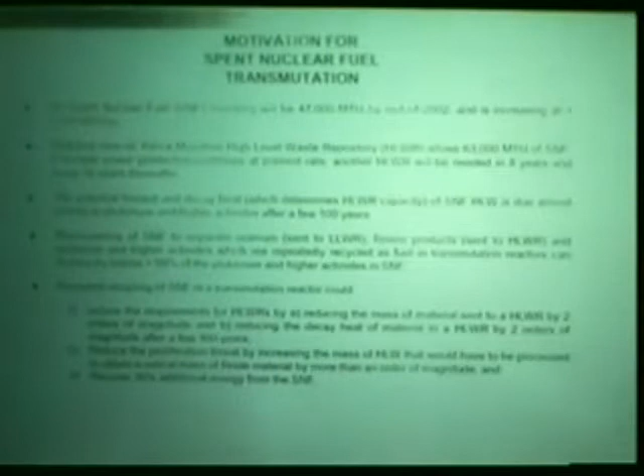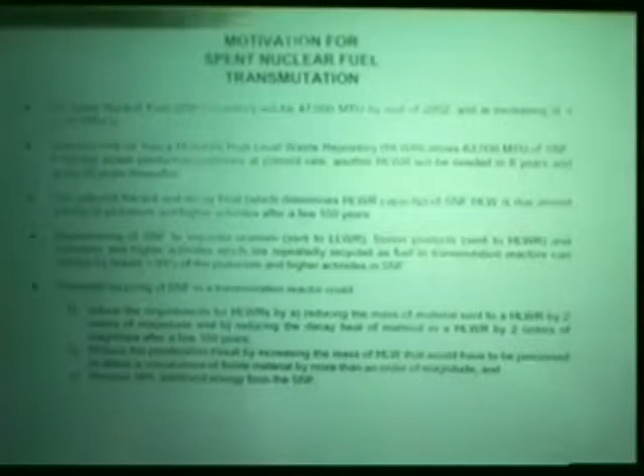The thing that really determines the capacity of a repository is the heat, the decay heat that comes out, and to a much lesser extent, the radioactivity associated with it. The idea of transmutation is that the decay heat and radiation for the first few hundred years is mainly fission products, but after that, it's the actinides, plutonium, and the higher elements. If you can get rid of them, basically fission them and turn them into fission products, then you can transform a 100,000-year problem into a 1,000-year problem. So that's the idea of transmutation.

When you start looking at it a little bit more, what you have to do is keep recycling this stuff, keep sending the actinides into a neutron source until you fission all of them. Of course, you're going to have materials damage that limits you before that happens, so you're going to have to reprocess. But if you do this continuously or repeatedly, you can end up reducing by a couple of orders of magnitude the amount of stuff, either in terms of heat or in terms of mass, that you have to put into a repository.

And so even if you can reduce it by an order of magnitude, your every 30 years goes to every 300 years before you have to build a new repository. So it's worth taking a look at.

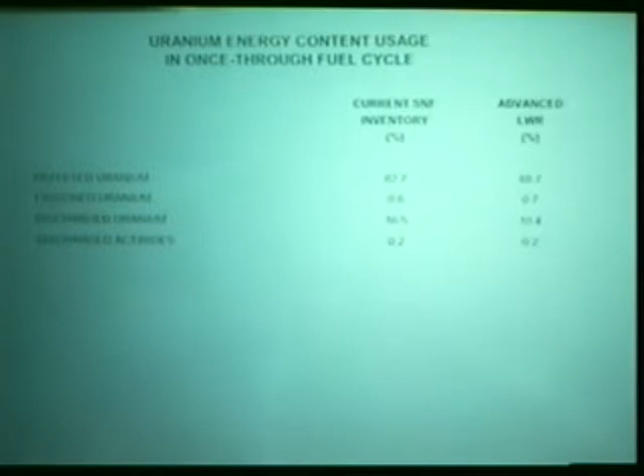Just a diversion on what we actually do with the energy content of uranium as it comes out of the ground. About 83% of it we just set aside after we enrich the uranium - this is what's left in the enrichment plant. We fission about 0.6% of it, we discharge about 17%, and in the actinides from this discharge we've got 0.2%.

Let's see, is there a... yeah, I need one.

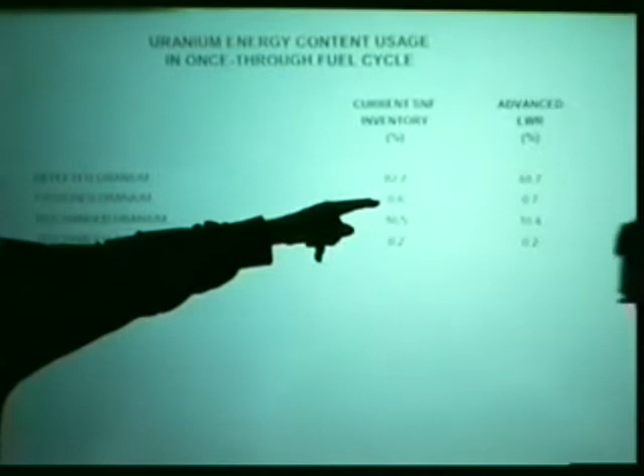So this is how much energy we're making use of right now, and we've got this in the actinides. So if we do this transmutation, at the same time that we're getting rid of the problem of waste repository, we're getting another 30% of energy.

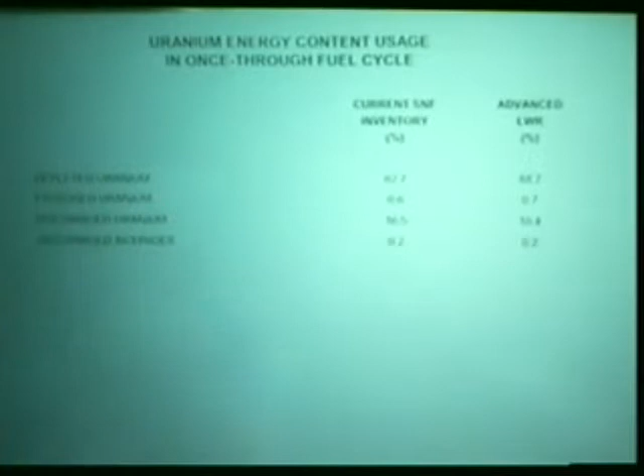Just something to point with. So, laser pointer - yeah, I got that.

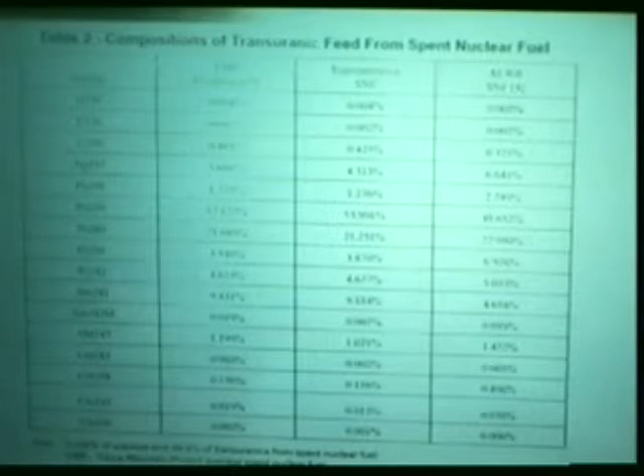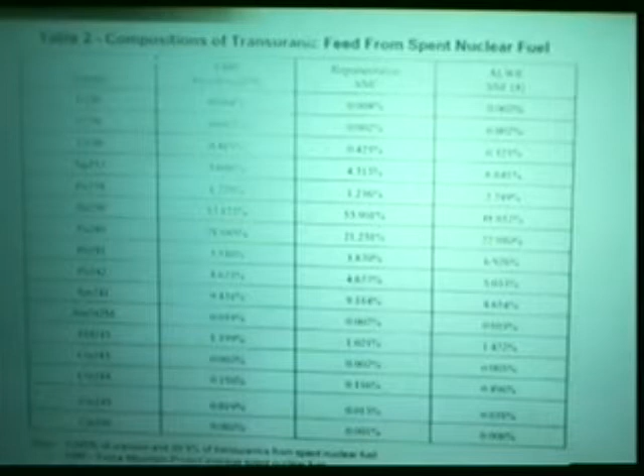All of these things have a fission cross-section, and so if you want to get rid of them, you have to fission them. If you just capture a neutron in them, then they go to another one - so you've literally just wasted a neutron, because you're going to have to get rid of that too.

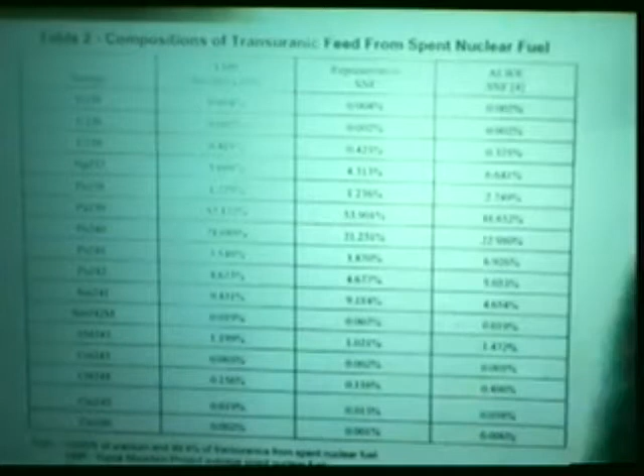Old technology, okay, alright. I think we can get started on this. So this is just in the way of background - this is what's in it.

So, how do you get rid of it? You get rid of it by fissioning it. Does everything have a fission cross-section? Yes and no - this is the fission probability of all of these various things.

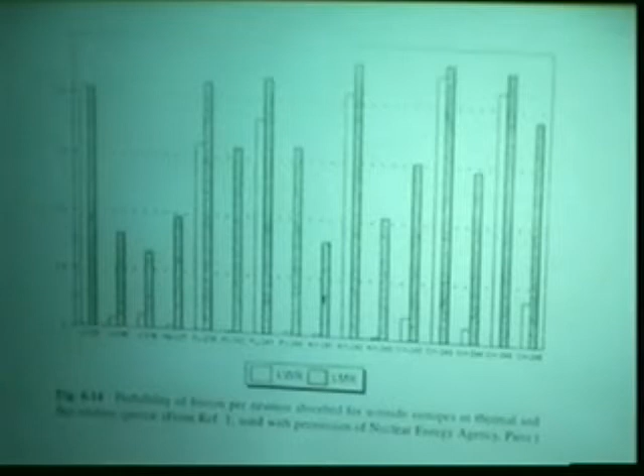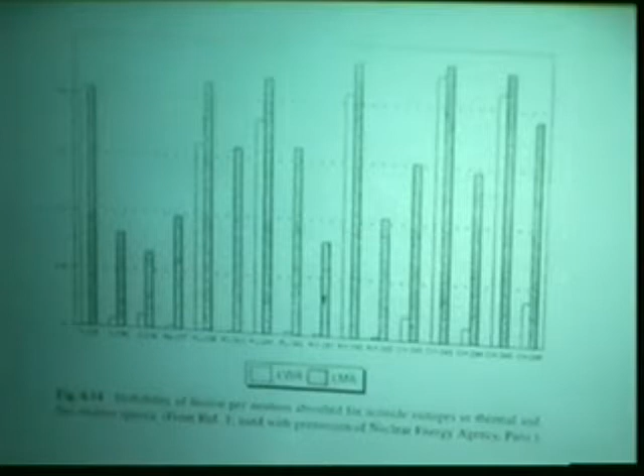Can you actually see these things? Okay, so this is U-235 in order. The crosshatched is the probability of fission if a neutron gets captured in a fast spectrum. The white is the same probability in a thermal spectrum. So you can see that in a thermal reactor, there are a lot of these things that are just not going to fission. But they all have a significant fission probability in a fast spectrum. And so, fast spectrum.

All right, what have people been doing about this? For the last roughly a decade or more, there's been a lot of interest in this worldwide, particularly in Europe, but also here and in Japan. So there have been a lot of studies of fissioning these isotopes.

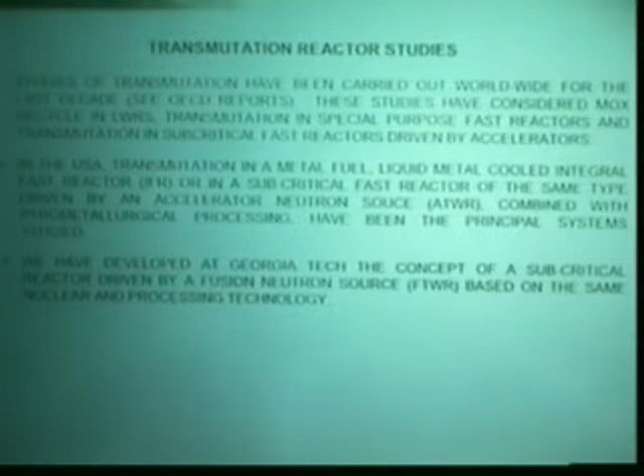And there are several ways you could do it. You could simply reprocess it, put it into mixed oxide fuel, and put it back in a light water reactor - try that, keep on doing that. You could put it in a water reactor, so it's going to have a thermal spectrum, so it's going to work, but not so well. You could build a fast reactor and do it there. You could build a subcritical fast reactor and drive it with an accelerator, and you still got a fast reactor - it's just one that's subcritical.

And so there have been an awful lot of studies on those sort of things. I'll show you right at the end some references - lots of reports, conference reports, websites and whatnot where all of this was documented.

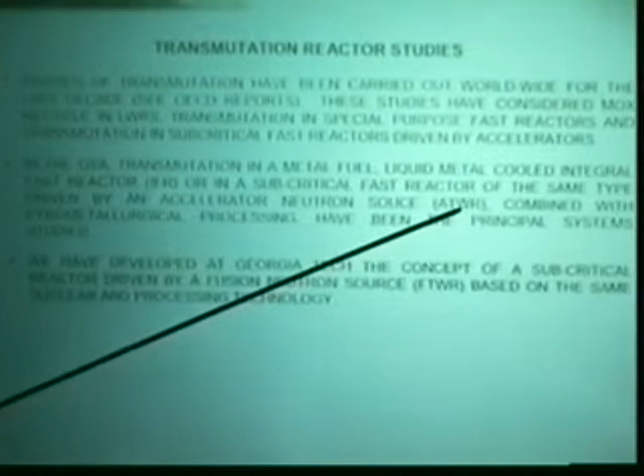In the U.S., there's been a lot of work that has concentrated on using basically the Argonne Integral Fast Reactor concept, which is a metal-fueled, liquid metal-cooled reactor, with the Argonne pyrometallurgical processing techniques to accomplish this, both in a critical reactor and in a subcritical reactor driven by an accelerator source - I'll refer to that as ATWR, and the critical reactor is the Integral Fast Reactor. So this has been where most of the work in the U.S. is concentrated in the past. This is changing now, but up to now, this is where the action has been.

As Lee said, I'm interested in fusion. It occurred to me that fusion makes neutrons too, and might actually be a little bit better neutron source than an accelerator. Probably get some argument from some people on that, but at any rate, a few years ago I got interested in it with the idea of, well, let's see what fusion could do for this too. So we've had an effort at Georgia Tech for the last couple of years, and there are a couple of other people around the country looking at this sort of thing, and I'll tell you a little bit about this in the process of going through this.

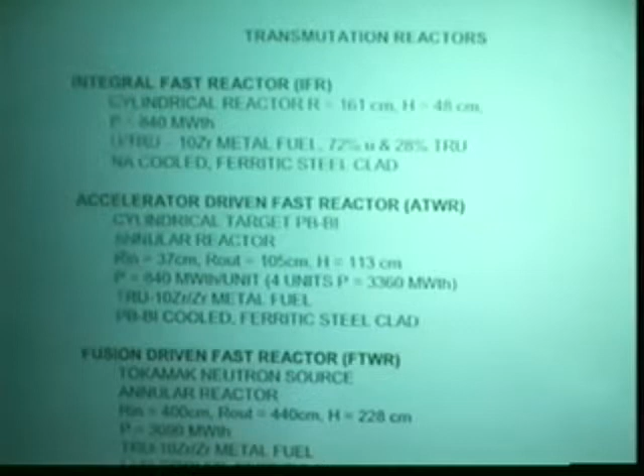All right, so what are those reactors that we're talking about? We're talking about basically the reactors that the U.S. has been looking at. So the integral fast reactor is basically a cylinder about 1.5 meters in radius and about 0.5 meter tall, 840 megawatts, sodium-cooled ferritic steel clad material.

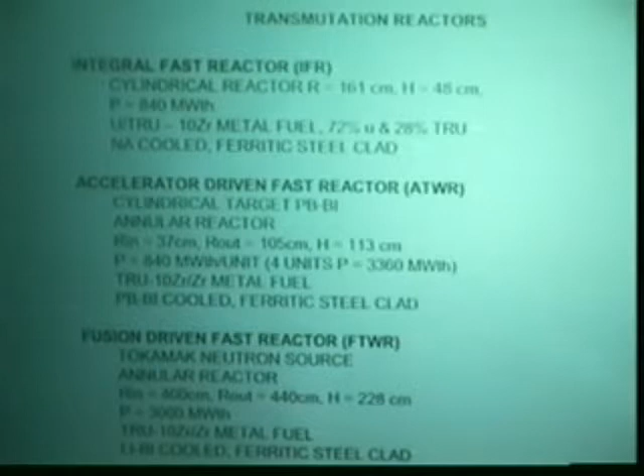And the fuel in there is uranium plus whatever actinides that you're putting in, plus what I showed you in that second view graph. And in fact, it's 72% uranium and 28% TRU, a buzzword for transuranics, the stuff we want to fission. So this has got 72% U-238 in it. So that means a reactor like this has as its purpose to destroy the actinides.

It has the U-238 in it because it needs the Doppler effect for safety. But having the U-238 in it, there are going to be a lot of neutrons captured in U-238, and what are they going to do? They're going to produce actinides. So they're going to cut down on the net destruction.

And so one of the ideas of operating subcritical is to leave the U-238 out. Because if you've got a bigger margin to a runaway, then you can afford not to have that fast Doppler, or at least that's the postulate.

So the accelerator thing is the same thing, except the accelerator target is something like that sits in the middle, and then that's surrounded by an annular reactor. You can see the dimensions here, and it was designed to be at the same power, and it uses the same fuel, except it just has just the transuranics that you want to destroy. No uranium, but basically replace the uranium by zirconium in there.

So in this, we're not going to make anything. And then we looked at this and said, okay, well, we'll do the same thing. We'll have the same type of technology. And so we're going to use exactly the same fuel as here. Well, I should say this is lead bismuth cooled. This one was sodium cooled. And I see here my secretary invented a new coolant.

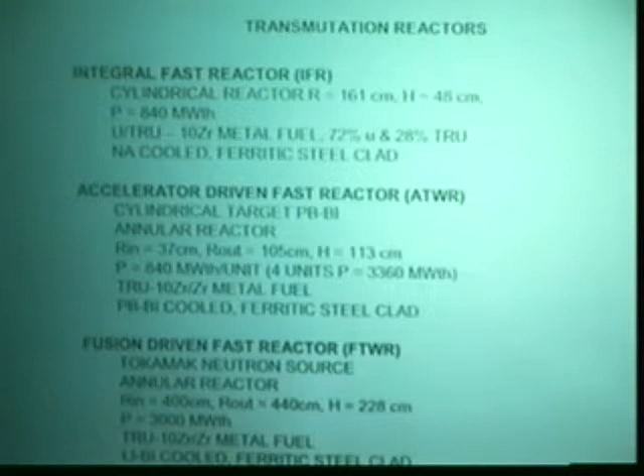But this is really lead lithium cooled down here, because in a fusion device you need to make tritium, so you need the lithium. And so that's what we added. So I'm going to show you during the course of the talk some comparison of the performance of these different things, at least to sort of isolate what is important about the differences.

But first, I have a colored picture of our fusion design, and this actually, I see all the design prizes along the wall here. This actually came out of our senior design class a couple of years ago, where we sat down and designed a fusion device that would do this job.

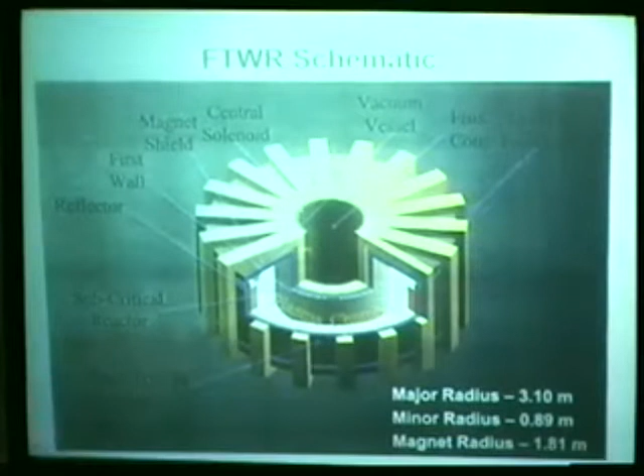So this is sort of a standard tokamak. These are magnetic field coils around here, and then the plasma goes around in a donut-shaped configuration like that. And then the reactor is sitting right out here. Okay, so it's right outside the plasma, and it runs all the way around. Funny reactor, but with this geometry, that's where it goes.

And so this is the subcritical reactor we're going to put out there. This particular design is with copper coils, and you can get those down to about 3 meters from here to here. So that's the dimension on this thing.

All right, these—forget the numbers unless you're particularly interested in fusion. Those are for people that will look at it later. But the philosophy of coming up with this design was to avoid pie in the sky, which is what fusion is usually accused of. So for the design of that device, we took the existing physics database, the same thing that ITER's being designed on. So physics that's already been achieved.

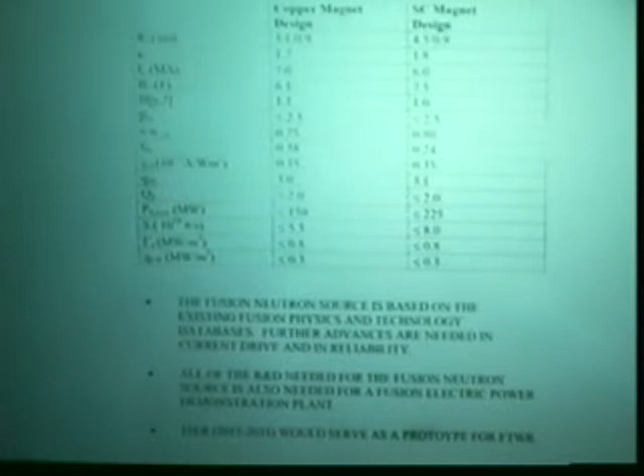And we took the existing physics technology, which Dr. Shannon has actually been involved in developing, along with other things.

So this is existing technology with one exception: the lead-lithium technology is not there yet, but it is heavily under development, especially in Europe, for fusion uses.

The next question is, if I were talking to a fusion purist audience, they'd say we're on a track to develop electricity and don't want to be diverted by something like this. Well, this is on the track, because you need exactly the same technology, and everything you learn here is going to help you on the path to electricity.

In the process, we're very soon going to hear an announcement that this first-generation fusion plant is going to go ahead, and the U.S. is going to join it. High probability for the first, a little bit lower probability for the second, but at any rate, this sounds like it's going to happen.

So this device might break ground for construction by next year, and would serve as an excellent prototype for this. It does all the things you need to do in a prototype to be ready to move into a transmutation reactor of this sort.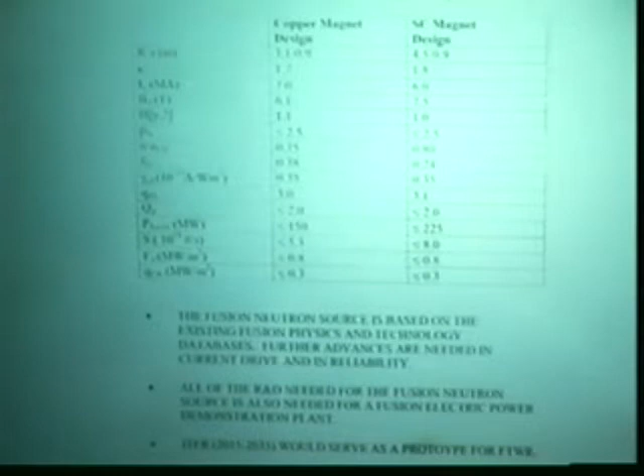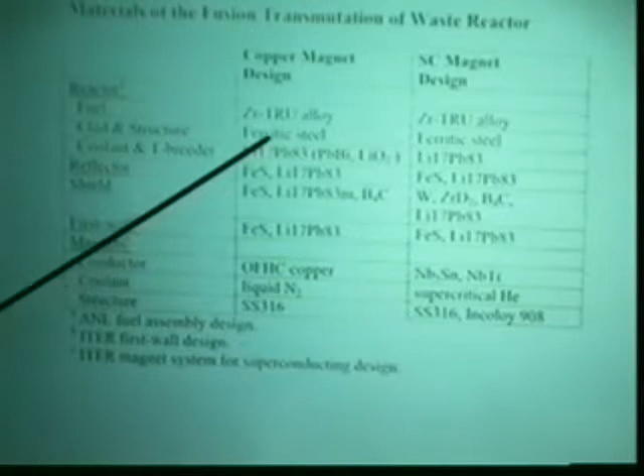Again, a little more detail than you probably need, but we looked at two designs: one with copper magnets, which I showed you, and another with superconducting magnets. In the reactor, we're looking at a zirconium and transuranics alloy metal fuel, using ferritic steel for clad and structure, and lithium lead for the coolant. We also looked at another option using lead bismuth because the accelerator design was like that, but our primary option is this. I don't think the structure or material of the magnets are particularly relevant.

Coming back to the reactor, what does it look like in more detail? Here's the tokamak, and this belt running around the outside is the reactor. You can see it in a better configuration here, and I'll give you the numbers on the next view graph. This belt is made up of fuel assemblies.

These are the same fuel assemblies, except for the height, as the ones Argonne has designed for the integral fast reactor and for the accelerator reactor. So we're talking about using existing nuclear technology at this point, not inventing some miracle material or design. We're taking the nuclear technology being used for the other U.S. designs, and this thing simply wraps around.

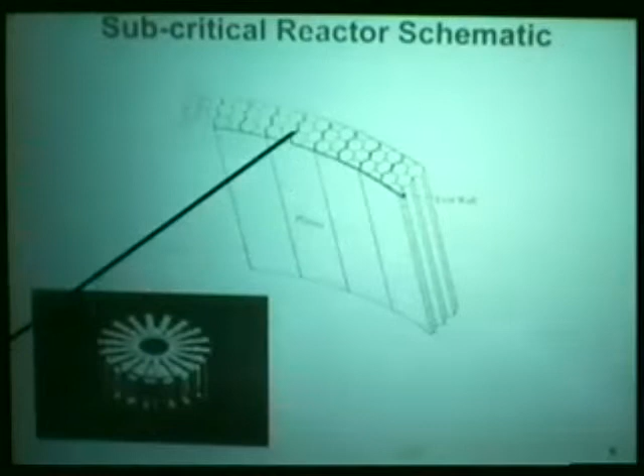Just a little more detail. You can remember this is the same picture as before. Each of these assemblies has 210 fuel pins and 7 structural pins. The assembly is 2 and a quarter meters in height, and the cross flats of one assembly is 16 centimeters. There are 470 of these assemblies wrapped around the outside.

We just took the Argonne design, so there are lots of detailed numbers. This has been looked at in detail, including the heat removal, and it actually works. In fact, people do it better than we do, but we also looked at that.

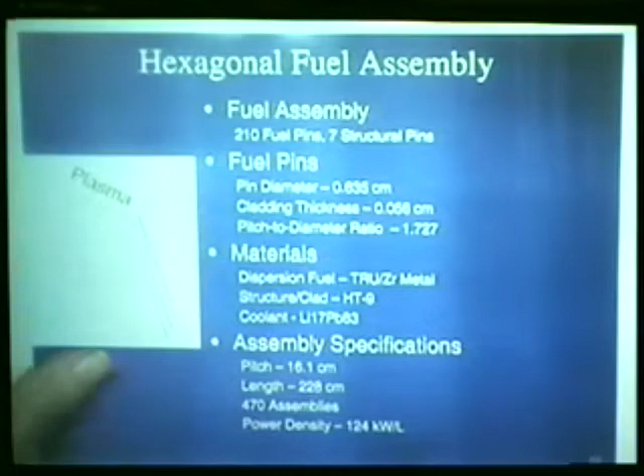One of the things I alluded to earlier is that operating subcritical instead of critical might have some advantages. So one of the things we did was take a preliminary look to see if there's any advantage to operating subcritical.

This is just plain old linear stability analysis for the stability of the reactor. We're plotting the fuel temperature coefficient here and the coolant temperature coefficient there. If we had a critical reactor, in order to be stable, one or the other has to be negative, as you might expect. Above this line is unstable, below is stable. But if you can operate somewhat subcritical, you can relax the constraints a little bit—you can even operate with positive temperature coefficients of both sorts, and the subcriticality pulls it down.

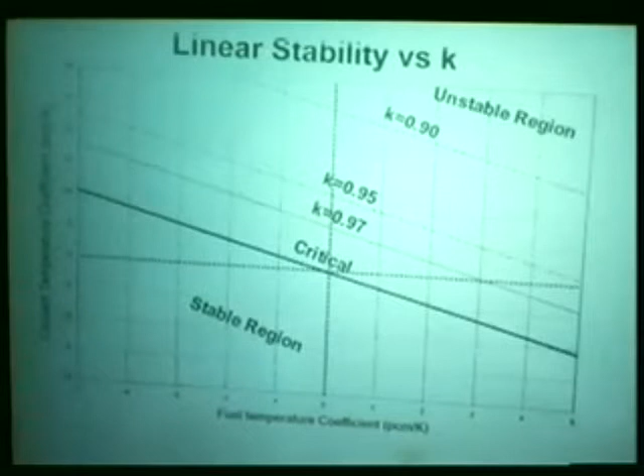We're actually talking about operating at max K around 0.9. So this doesn't prove an advantage, but it points out there might be one, because you're not so close to critical that you have to be so careful about your temperature coefficients. Remember, I said the critical reactor has uranium in it because it needs a prompt Doppler effect—and maybe the subcritical reactor doesn't.

Okay, we also took a look at what would happen in a couple of accident cases on the fusion design.

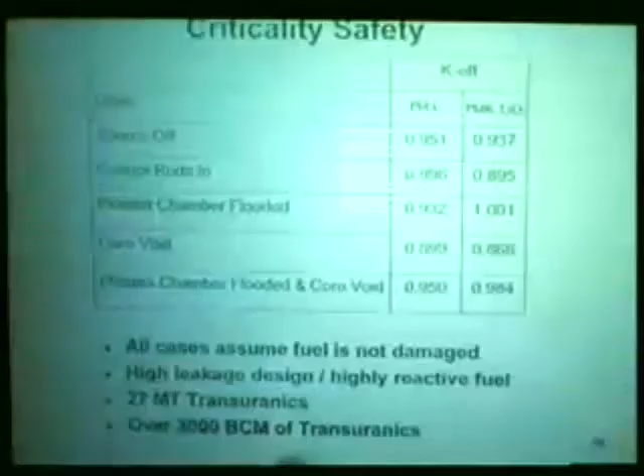So basically, if we turn the source off, an eigenvalue calculation of that ring reactor gives us - we did it for two different designs with different coolants, but let's just look at this one. This gives us, with source off, a K of 0.95. That's a maximum criticality condition. We've got some control rods that we stick in, and that would bring it down to like this.

Now let's look at a couple of accidents. One of them is, suppose the plasma chamber just gets flooded with the coolant. Well, what this is going to do is act as a reflector to reflect neutrons back into the reactor, because the reactor surrounds the plasma chamber. So that brings it up to 0.93. For this design, it brought it up to a little bit supercritical.

We didn't work too hard on this design. I'm sure that could be fixed.

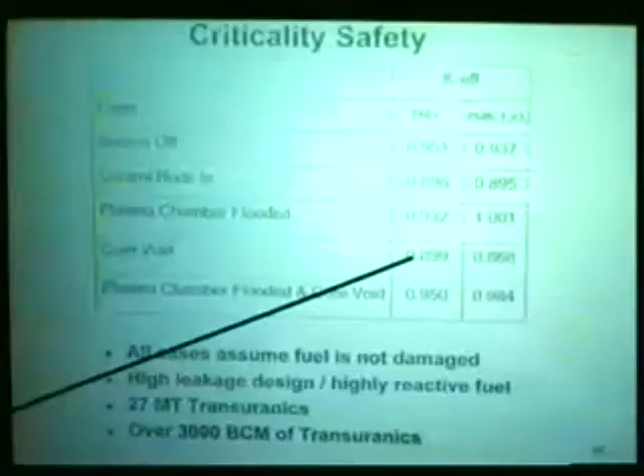The other possibility of something massive happening is suppose you lose the coolant in the reactor. So you just void the core, you get in the hardest spectrum. The fission to capture increases, and so you've got a more reactive condition. And that would take it up by itself to 0.89 or 0.90.

Now suppose both of these things happen at the same time, and that comes up to this level. This is where the rod's at.

So it looks like there's a fair range there in which you can guarantee that you're not going to go supercritical. It certainly takes much more work than this to say that it's going to be safer or anything else. But at least there's a space of hope, because you've got a range here where things just look better.

Okay, now how does all of this work? Let's get into the transmutation aspect of it itself. This says the fusion transmutation of waste reactor, but this is the fuel cycle used for all of the integral fast reactor, the ATW, and this.

So spent fuel coming out here, separate out the uranium, separate out the fission products that come out, send this through a pyrometallurgical process, get the other fission products out. So what we have here going through is the plutonium and the actinides left from the spent fuel, what I showed you there.

Make a fuel element out of that. In this example, we're making a metal fuel element. Put it in this transmutation reactor - that's the FTR here. It could be the accelerator or the critical one. Burn it as long as you can, and I'll come back and talk a little bit about that in a minute. But burn it, and then bring it out.

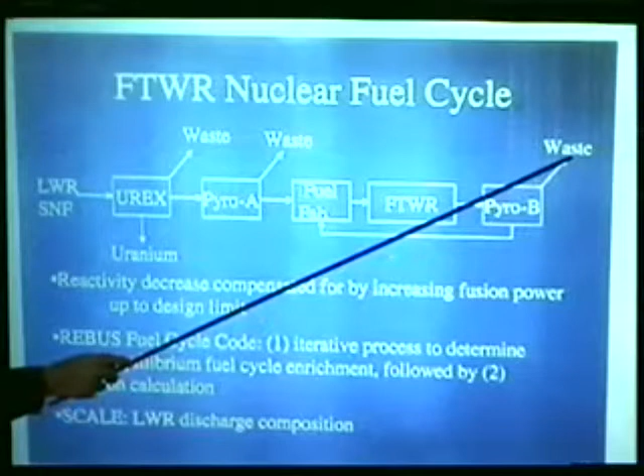Process it out again through the pyrometallurgical process, get the fission products out, send them to high-level waste, and the actinides and plutonium to the left, bring it back here, mix it with the fresh, quote-unquote, spent nuclear fuel, and send it back through again, and just repeat this process. Okay, so this is the idea.

We looked at this fairly carefully, just to digress a little bit. The way we decided to operate the reactor was to stay at a constant power level and to compensate for the reactivity droop with burnout by raising the source. You remember the source, or the neutron population in a reactor, is S over 1 minus K, and so as K goes down, you can make S go up, and you can increase the fusion power a little bit - hence the fusion neutron source - and stay at a constant power.

We use the Argonne fuel cycle codes, and these are fairly sophisticated things that have been developed over a long period of time that come to an equilibrium, that do a lot of iteration and come to what an equilibrium fuel cycle would be. And they've got transport codes in them where you calculate all this stuff in detail. So this calculation was done seriously.

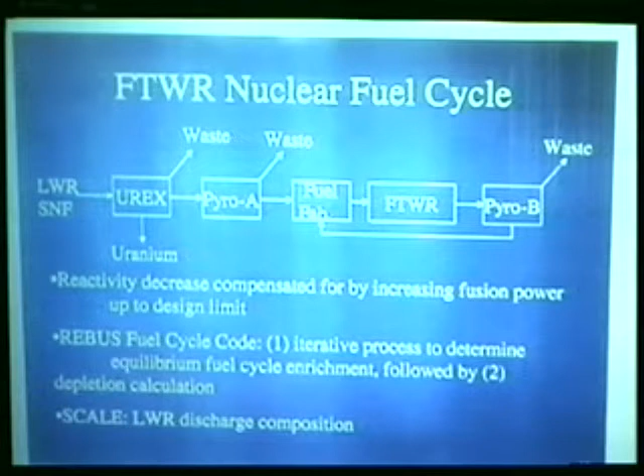And we also calculated the composition that we would start with. That one of those columns I showed you at first was one of our calculations, and so we go back here and we calculate with the scale from the LWR. So this part of it - this actually was a PhD thesis that Hoffman did. We did this one pretty thorough.

A little bit of perspective on the performance of the fusion version of the transmutation reactor. Let me just concentrate on one. We've got two of them, the copper and the superconducting, but let's just look at this one. This was designed to break even on electrical power.

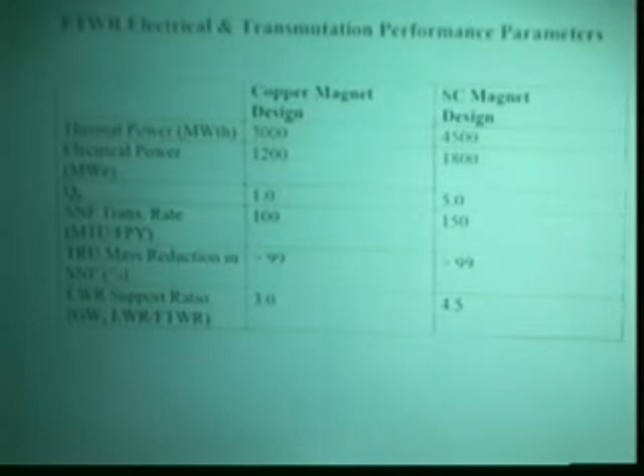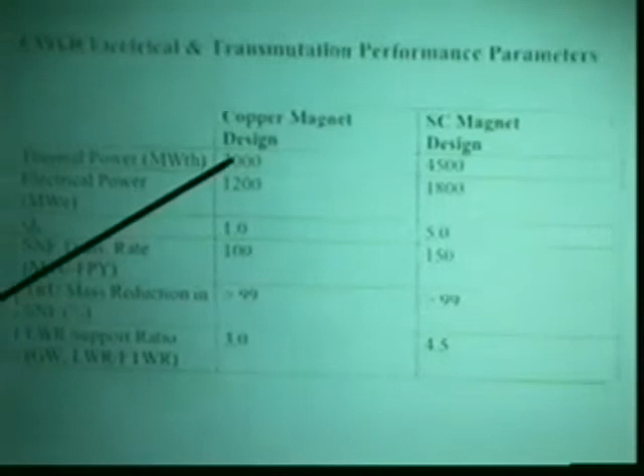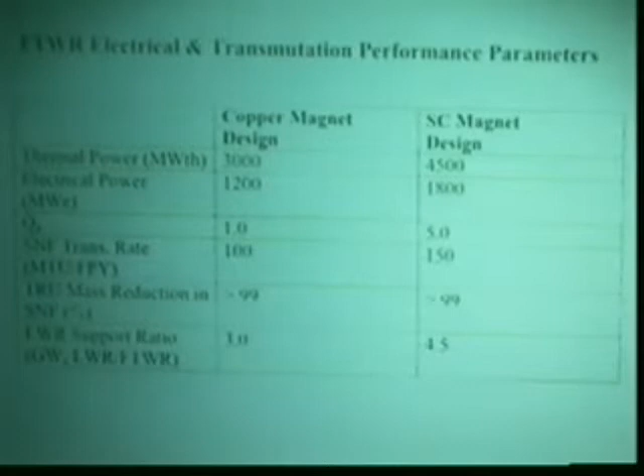Now, copper magnets are horrible because they're resistive, and tokamaks need lots of field, which means lots of currents through resistance, and so you've got a lot of resistance losses, and a lot of power required to get that heat out that you put in. So it's a killer. This thing is designed at 3,000 megawatts thermal. We think that would come to about 1,200, and we would basically use all of that to drive those magnets against resistance and remove the heat. Clearly not a great thing to do, but that was our design on that.

And so we came out with the ratio of electrical output to electrical input of 1, which was what we were after. And if we looked at these things, never mind these numbers right now, we said how many of these will we need to support all the spent nuclear fuel that's coming out of all the LWRs.

And so you can calculate this. You calculate how much comes out of an LWR, and it depends only on the power level of the LWR, and of course the enrichment, but it depends on the power level. And the rate at which you're transmuting in the transmutation reactor also depends on the power level, because what you're doing is fissioning, and that's power for all practical purposes. So you can go through and calculate this.

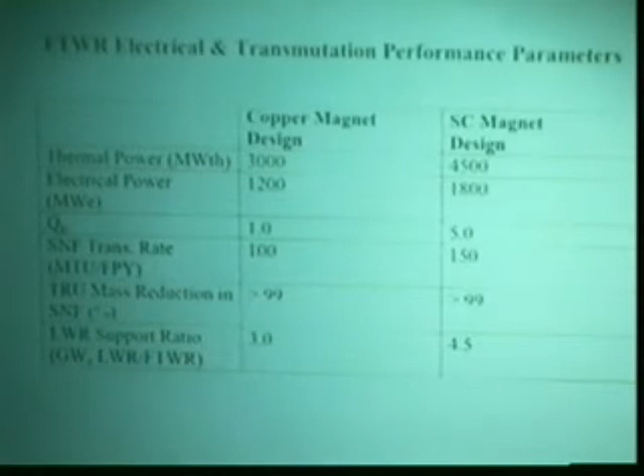And this basically, one of these would support 3 LWRs at the same power level, so there's a 3-to-1 ratio. And so what that means is that in some sort of equilibrium of this sort—and this is almost independent of whether it's a fusion device or any other device—25% of the quote nuclear power is coming from the transmutation devices, and 75% from other devices, from the LWRs. So that's the meaning of the number.

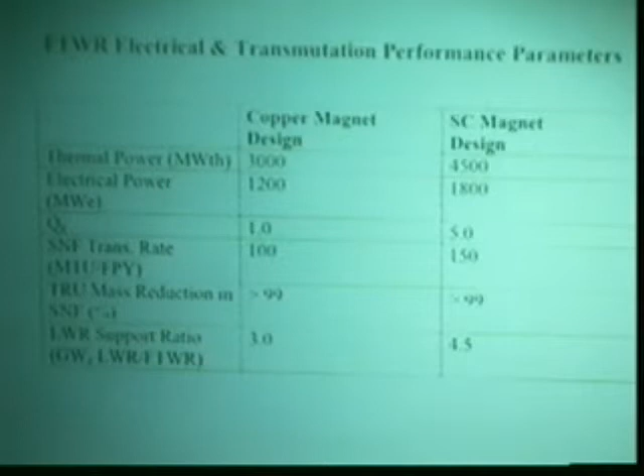All right, we compared the 3 reactors. We were interested in fusion, so we were interested to see if we could at least do as well as the others. And there are lots of numbers here, and this is for people that really want to look later.

But what we've compared is what we're doing right now, the once-through cycle, one recycle as MOX fuel in an LWR, just take it out and recycle it once, and then here's the fusion, the accelerator-driven, and the critical fast reactors. Now, there are lots of numbers there, and we went through and did these fuel cycle analyses on all of these, and we fooled around with what's the best way to shuffle the fuel, and so we came up with 5 shuffles here, either 7 or 8 here, 7 here. We did the best we could come up with.

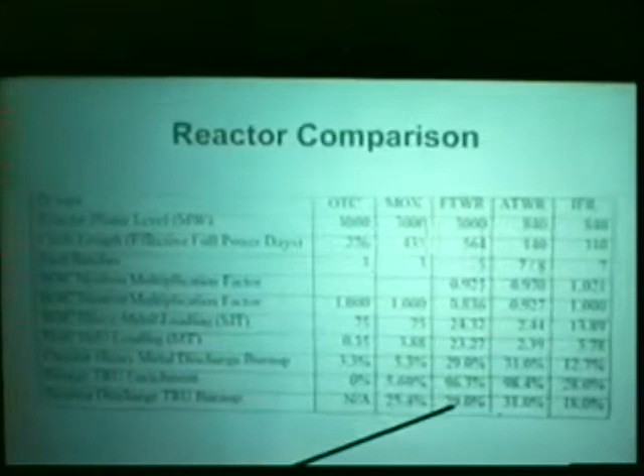The thing that's important is to look down here at the burnup of the discharge after we go through a fuel cycle, how much of the original transuranic loading has been destroyed. Okay, for these, because that's not applicable here, 25% here for the MOX going through 29, 30, and 18.

And then if we go through and look at the heavy metal discharge, the burnup, the actual burnup that we get—in other words, what goes in at the beginning versus what comes out at the end, or the other way around.

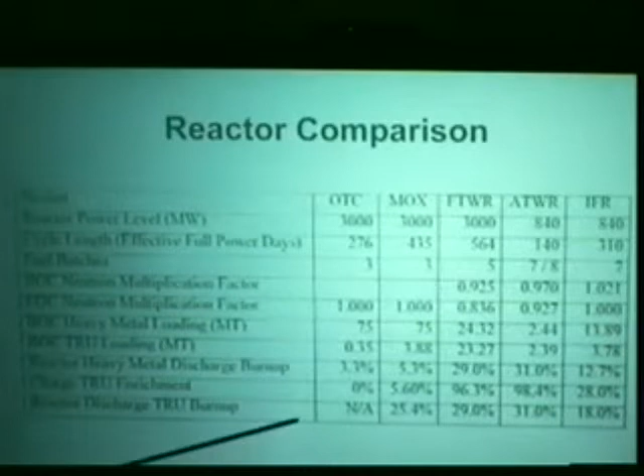Then we find that for the two subcritical reactors we're talking about, in one fuel load, before we have to reprocess the fuel, we can burn up about 30% of the transuranics. In the fast reactor, it's only about 13%, and the reason for that is the fast reactor is making actinides because it's got uranium in there. And so this is going to come out as a real advantage. And of course, in these guys, which are making transuranics like crazy, you don't get much of a gain at all. So this is going to explain the curves that I'm about to show you.

So all of those numbers can be better seen in curves, but the explanation is there. So let's look at a few things.

And the critical fast reactor has to reprocess the same fuel more times because it's making new actinides as it goes. So that's the difference between this curve and this curve. So it's really the fuel. It's not that it's subcritical or critical. It's that you've got fuel with uranium in it here, and you've got fuel without uranium in it here. And the hope is that the additional safety features of operating subcritical allow you to do that. So that's really the key to that.

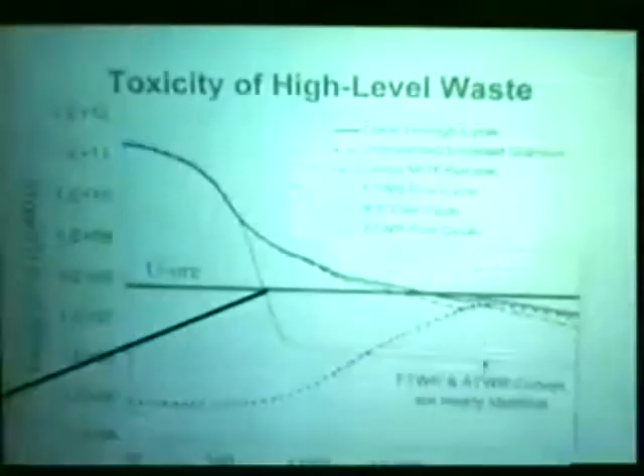But these look pretty good, okay? And then here we're getting down to ore in 500 years, something like that.

Now here's the real result. Because as I said, the thing that sets the limit of repositories, we're going to store all this fuel, we're going to close them up, and we're not going in there. And so what's going to happen? Well, they're going to heat up. They're going to heat up because of decay heat. And so we've got to have enough natural circulation, enough volume, all of this stuff that we can remove that decay heat without something bad happening. And so this sets the capacity. It's this sort of decay heat requirement that sets the requirement on how much stuff you can put in.

So here is the decay heat of the once through cycle. If we just take the spent fuel as it comes out, it's going to stay up there. If we run it through, recycle it once as MOX, it's going to not help too much. It'll decrease it a little bit.

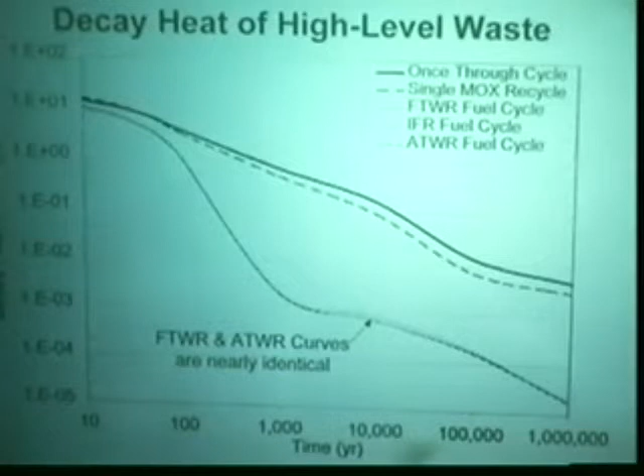But then, if we burn up the actinides somewhere else, burn up all the plutonium and the higher actinides elsewhere by fissioning them in a transmutation reactor, then all we're dealing with here is a little bit of the actinides and the fission products. So here, this dies when the fission products die. And so you can see that there's a couple of orders of magnitude in here as we go on out. And so we're decreasing the decay heat by a couple of orders of magnitude.

If this sets the capacity, then maybe we can get a couple of orders of magnitude more spent fuel in there. Now, this is just a calculation without any reality of nuts and bolts, so let's not say a couple of orders of magnitude, let's say an order of magnitude. But it gives you some hope that you could increase the capacity of the high-level waste repositories by an order of magnitude. And that means instead of every 30 years, every 300 years. Different ballgame, totally different ballgame.

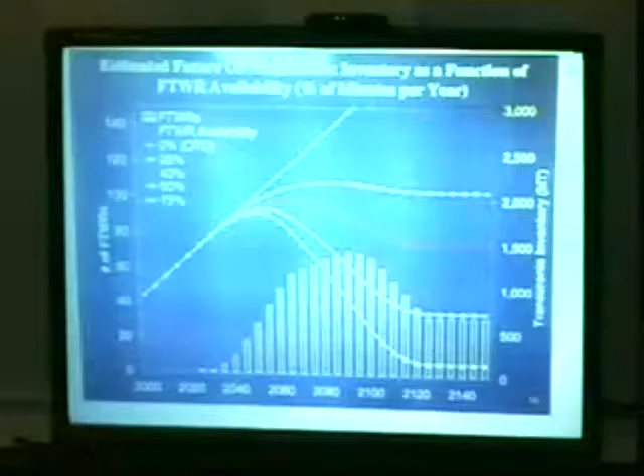Okay, now let's look at what the world might look like if we were doing this. And this is a scenario, which means we sat down and said, well, how would you do this? And then we made the calculations. And you could sit down and say it, and you'd probably make a different scenario. But this is a scenario.

And so what we did is said, okay, well, let's look at what's realistic. The fast reactor people think that their technology, for the reactor and for the pyrometallurgical processing, would be ready that they could start building a reactor about 2030. I think that you could say the same thing for fusion, except it's about 2040. So along about 2030, 2040, you could start building these reactors. We got the mix. You could just start building transmutation reactors. And so here's a scenario.

Looks like we thought we could build one a little bit earlier. But here's a scenario, basically, where we're building these transmutation reactors, and we're going to build them about as fast as seems reasonable. Okay, what's reasonable? That depends on who's reasoning. But this is what we looked at.

These things run about 40 years, and the reason it goes down here at the end is you're not replacing ones that are going out of commission. But we postulated some sort of scenario like this. So this is the building of them.

And then what we looked at was, well, what's nuclear power going to do over the next 200 years? We assume it's going to stay constant, that the amount of nuclear power produced in the United States is going to stay constant as long as this graph goes out. You could make other assumptions and get different curves, but we just assumed it's going to stay constant.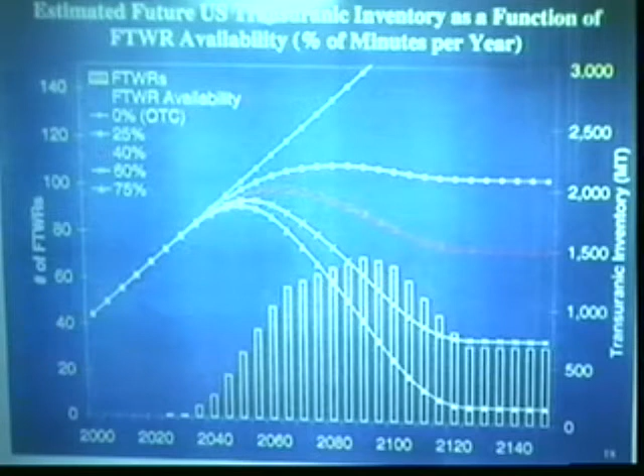But okay, you see what I'm doing. So let's go to 75%, if we could ever get to 75%. Then what we would do is come down here and come to an equilibrium down there. It's much less than what we have right now. Now, does that mean we don't have to build Yucca Mountain? No, no, no, no. We have to have Yucca Mountain. And so this begins to look nice.

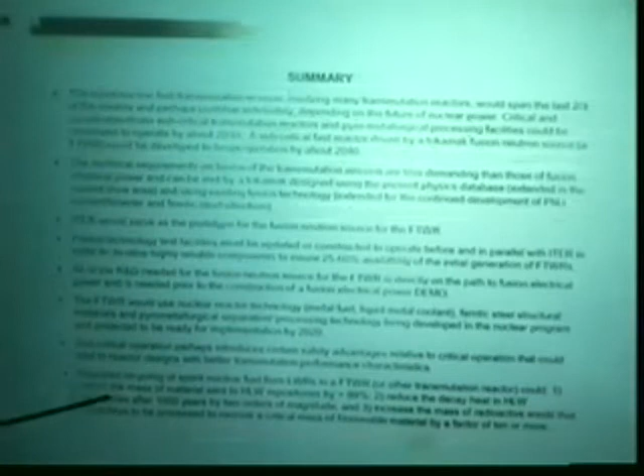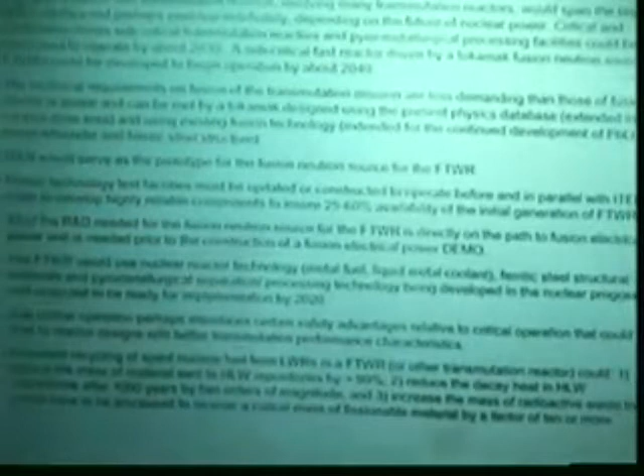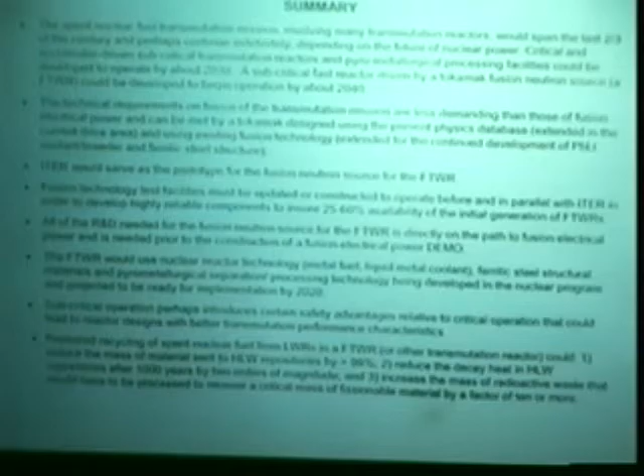This, again, is more intended for a fusion audience. The fusion device that you have to build to do this can be built on the basis of existing physics, of what's already been accomplished. That physics would not lead to a good reactor that was a net electrical power generating reactor. We're still working on the physics in the fusion business to get it better, but we don't need that improved physics for this device. We could do it with the physics we have. What we need is to get that physics reliably 75% of the time.

That's the problem, and you learn that by building those things and running it -- just run it like that. And ITER would do that for us. ITER would be a good prototype for this thing that would get us started. But even if we did that, the first fusion device we built would probably get 20% availability, and the second one coming 20 years later would probably get 50%. Go into it like this.

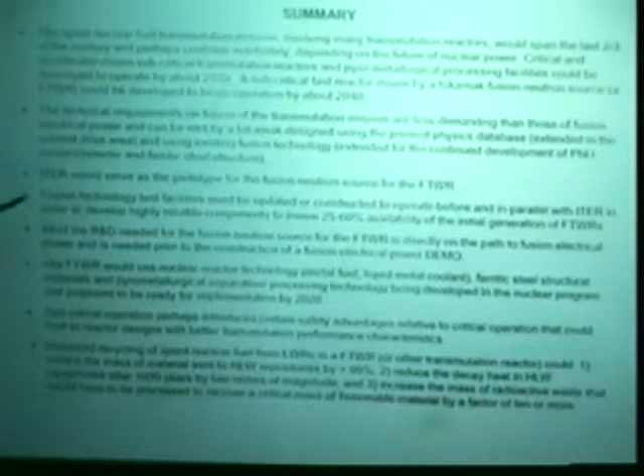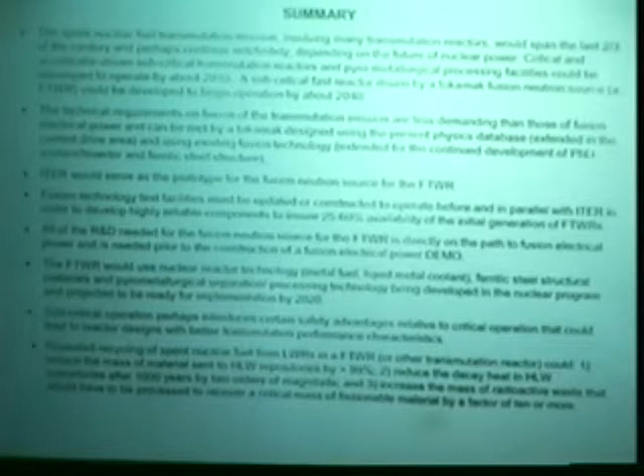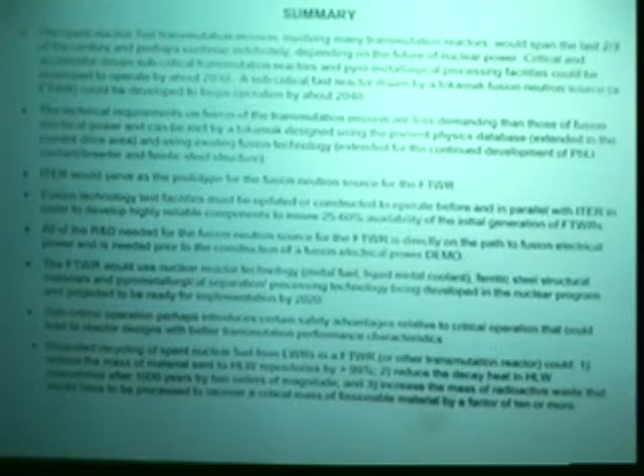Again, this is also for fusion audience. You need to build some test facilities, or upgrade some that exist, and run components so you can get this availability. That's what's needed. Fusion is a physics science, and all the interest is in doing physics. But for this, everything that needs to be done is to develop components that don't fail, and you do this by running them. So create some facilities for that.

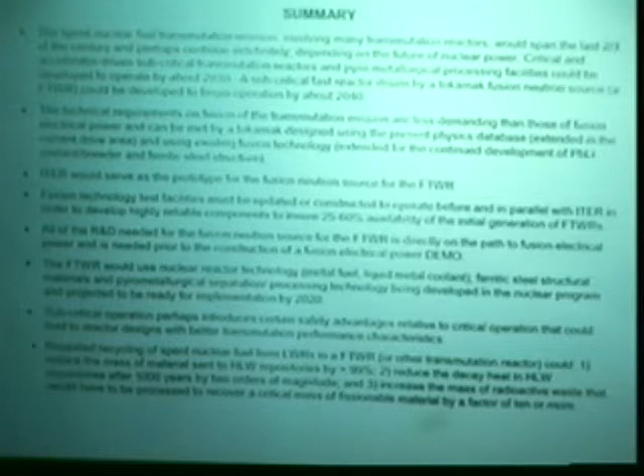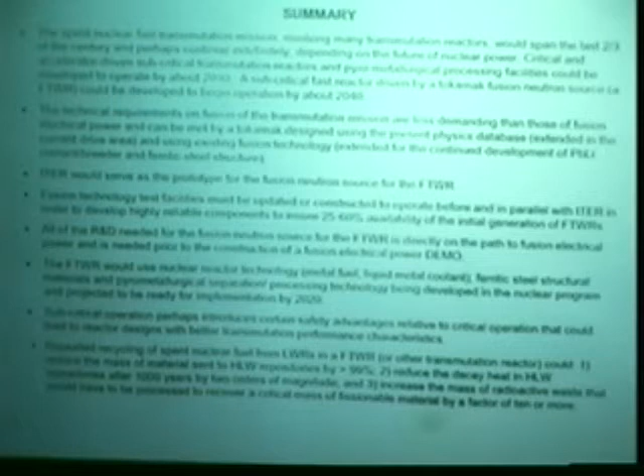Certainly, as I envision it, the fusion transmutation device would use the same nuclear technology as any other device. So it's not necessary to invent some new nuclear technology or new fuel type. You just take whatever you've got. The problem, of course, is wrapping it around in that funny shape. But once you look at that picture a few times, it's not so bad as it looks when you first see it. Or it just happens to people like us that have seen too many.

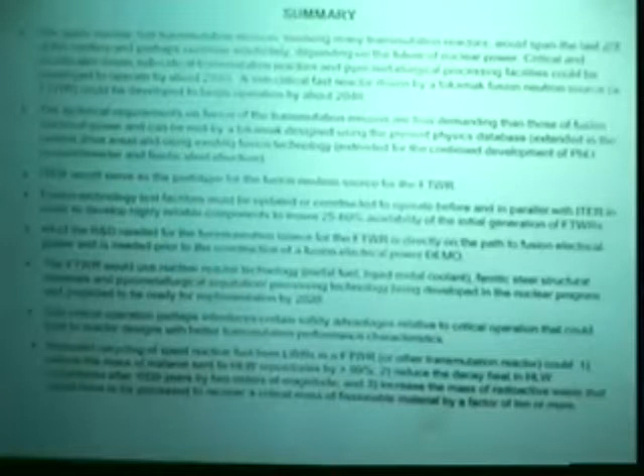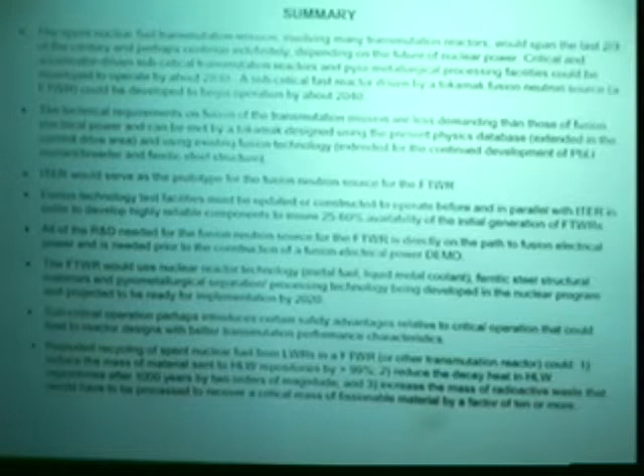I've really put a lot of caveats in this sentence. I think the credibility of running with a fusion transmutation reactor or an accelerator transmutation reactor is going to come down to: are there some safety advantages that will allow you to get a better design of the transmutation reactor? Because clearly, either a fusion or an accelerator device is going to be a lot more expensive.

You've got a reactor plus something, whereas with a reactor, you just got a reactor. So clearly, going with a subcritical reactor is going to be more expensive. The only reason it makes any sense is that it gives you something, and it gives you something that makes the overall cost, when we start talking about repositories and everything else, cheaper. So the question is whether subcriticality leads to certain design features which lead to better transmutation properties.

And very specifically, will it allow you to put in fuel without U-238 in it? Because putting in that U-238, you're half defeating your purpose, because you're building up more of the things you're trying to destroy. So will it really allow you to do that? I don't know. That's a good question. Good PhD thesis.

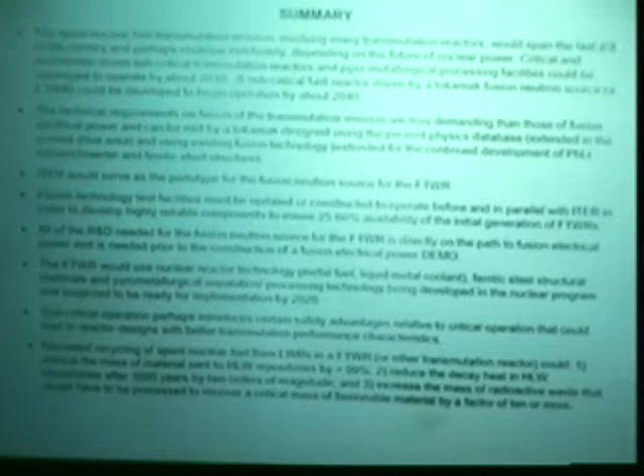Okay, but if it does, then the promise of it is quite good. And what the promise is, as I've said several times, is you eliminate by fission these things that have long life, in favor of more things that die out in a few hundred years - the fission products. The net effect of this is you reduce the decay heat by a couple of orders of magnitude. You'll also reduce the mass, but it's not the mass that really counts - the mass of stuff that has to go to high-level waste - it's the decay heat that counts.

So you can increase repository capacity, and maybe think about a repository every several hundred years rather than one every several tens of years. So that seems to me to be the real promise. And the view graph that was up when I started showed that if you don't have much fissionable stuff in all this high-level waste, you have to process more of it to get a critical mass. It's obvious - you can also calculate it. So that's it. Thank you for your attention.